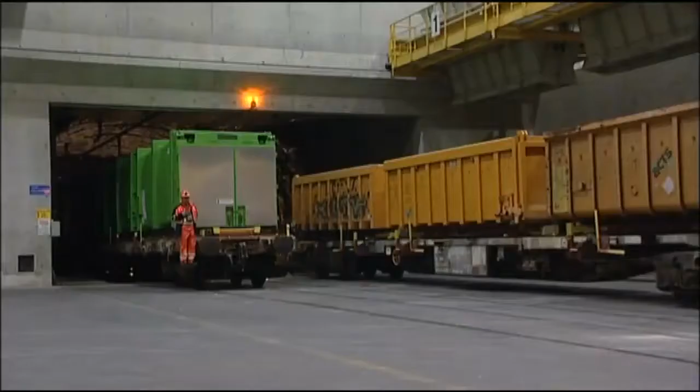Tridel is connected to the Swiss railway system. In Lausanne, the convoy enters a 4-kilometre-long tunnel that ends in the centre of the waste treatment plant. This tunnel runs unnoticed under the city. It offers rapid access to the plant without disturbing the population. On average, 5 trains with 4 wagons use this railway line every day.

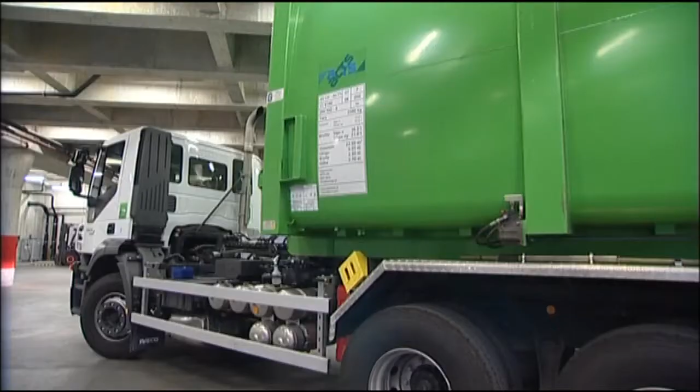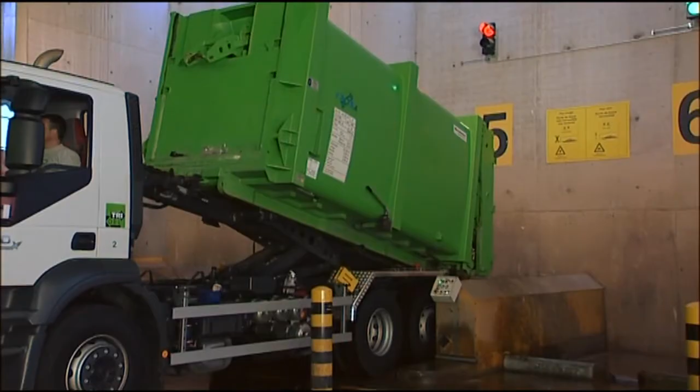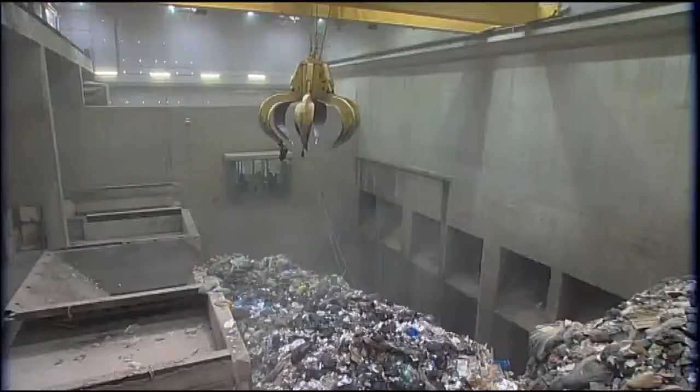For environmental reasons and for the integration of the plant into the urban site, the building is 2/3 underground. The train station is on the lowest level of the plant. After having been weighed, the garbage is poured into a huge 10,000 cubic metre concrete pit for storage, whose walls are 60 centimetres thick and 30 metres high. Here, the quantity of 2 weeks of waste collection can be stored in case of a factory shutdown. The ovens are usually working 24 hours a day.

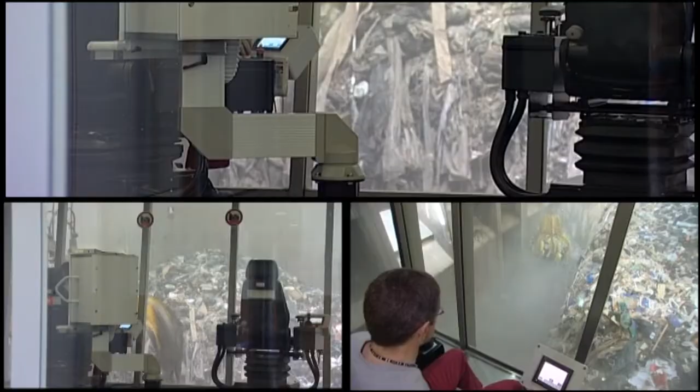In this control room, the operator works. He feeds the ovens. At the same time, he is responsible for crushing the bulk waste and mixing it with the rest of the garbage. Like a giant spider, this grapnel, steered by the operator, carries 2.4 tons of waste with each grip. That's more than 200 waste bags at one go. The garbage is poured into a hopper, a sort of funnel that takes the waste to one of the 2 ovens.

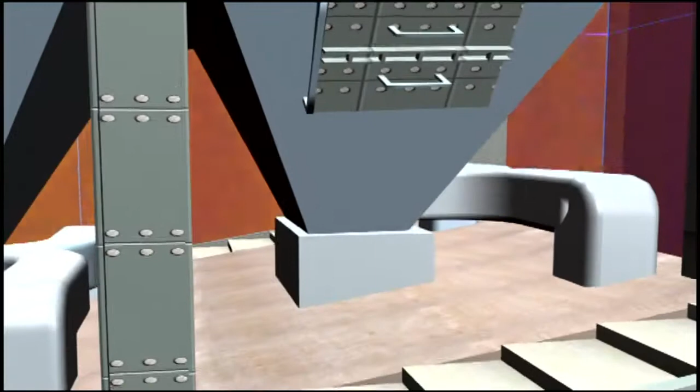Welcome to the furnace. Here it gets very hot. The maximum temperature in the combustion chamber reaches around 1100 degrees centigrade. Most of the waste burns instantaneously without additional fuel. This temperature is necessary for the destruction of the greater part of the waste. To reach such a temperature, the fire is stoked by a supply of forced air under the combustion grate. Thanks to the reciprocating movements of the grate, the burning waste reaches the exit of the oven.

This enormous heat is recovered in the boiler, lined with 42 kilometers of water-filled pipes. The high-pressure steam produced is used for urban heating and the production of electricity. At the exit of the boiler, so much energy has been recovered that the temperature of the flue gas has dropped from 1100 degrees to less than 200 degrees. Now the flue gas produced by the waste incineration has to be purified.

First step is the electrostatic precipitator. By using a process of magnetic fields and static electricity, the largest dust particles are attracted onto metallic plates more than 10 meters high. These plates are regularly beaten with hammers to dislodge the dust, which is collected for later treatment.

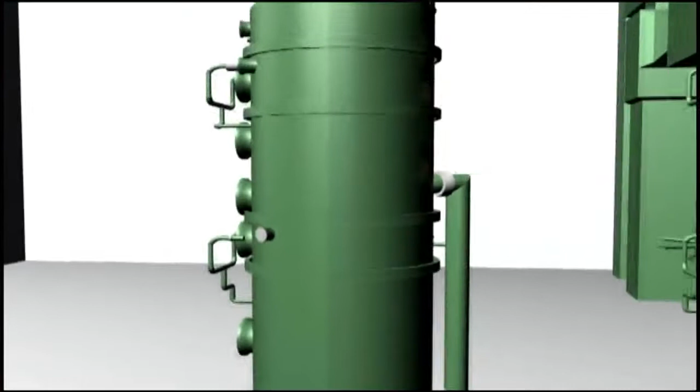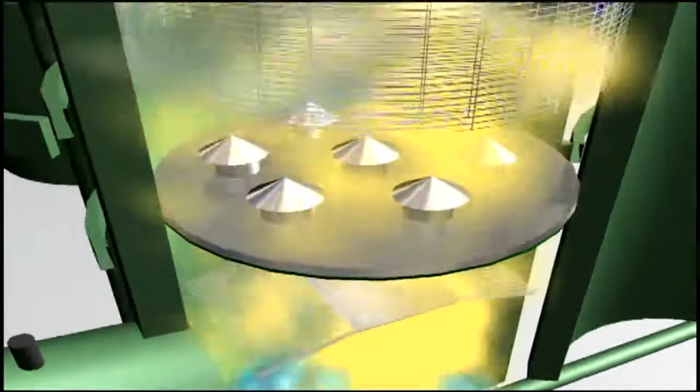Second step, the wet scrubber eliminates the finest particles. To start with, the flue gas passes through a curtain of water before reaching the wash tower. Here the flue gas passes through different floors to capture acid gases, heavy metals and sulfur oxides. Finally, a mixture of water and soda neutralizes the flue gas chemically.

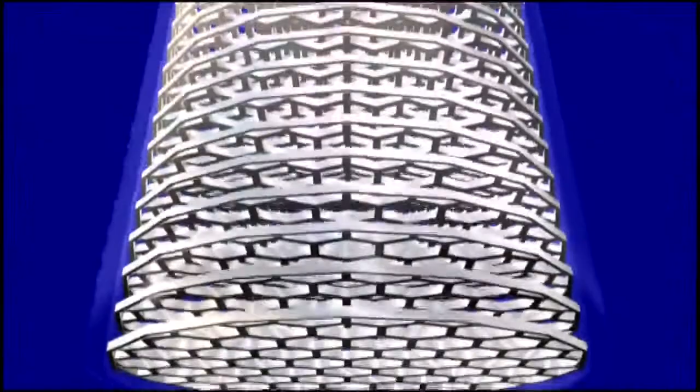Last step, flue gas passes through a catalyzer which destroys nitrogen oxides, identically to the catalyzer in cars. Highly toxic dioxins are also destroyed here. Today, this flue gas treatment installation is the essential element of the plant, using the most modern technologies. Sucked by a powerful fan, the purified flue gas is finally released into the atmosphere via an 80-meter chimney. Thanks to these innovative processes and to continuous controls, Tridel shows excellent results, 90% below the legal norms for air protection.

Another essential element is the double use of the thermal energy recovered during incineration. The water heated in the 42 kilometers of boiler pipes is transformed into steam at 50 atmospheres pressure. This high-pressure steam drives a turbine linked to a 20 megawatt generator. The recovered steam is also used for the urban heating system of the city of Lausanne.

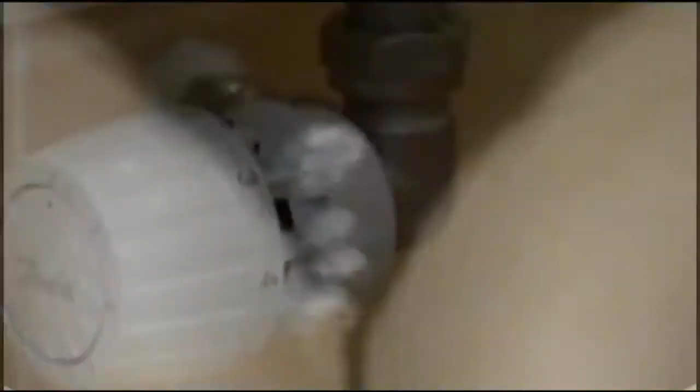Through this combination of the production of distance heating and electricity, the Tridel plant has one of the highest degrees of efficiency in Switzerland, with more than 50% of recovered energy. It has the capacity to produce heat and light for 18,000 people. That's the equivalent of a town like Vevey or Nyon.

In winter, Tridel provides energy mostly for the urban heating system. In summer, the factory produces more electricity. Consider this the next time you switch on a light or use the radiator to dry your towels. The necessary energy might come from the combustion of your waste bags. Waste transformed into energy. And so we've come full circle.